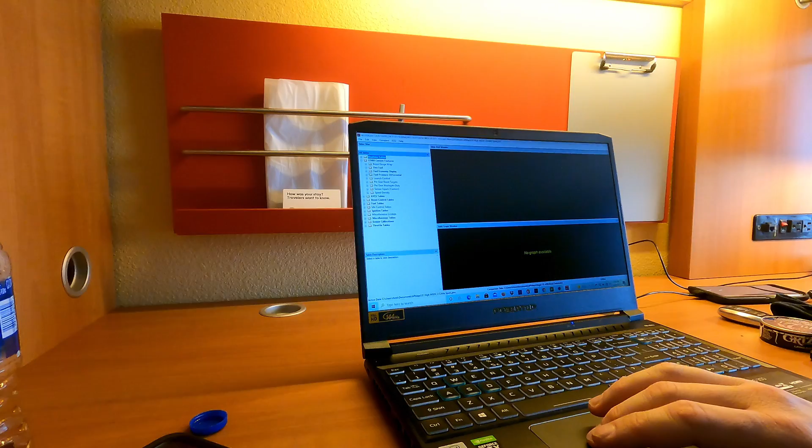So that's what it had on it. And I was figuring, well, it was an off the shelf map. It probably was knocking, whatnot. However, from a few things I did, I noticed, and all I did to change the map initially before I got here was this is comparing the map to my current one. So let me see. Let me try to zoom in here. I know I need to get a screen grab function.

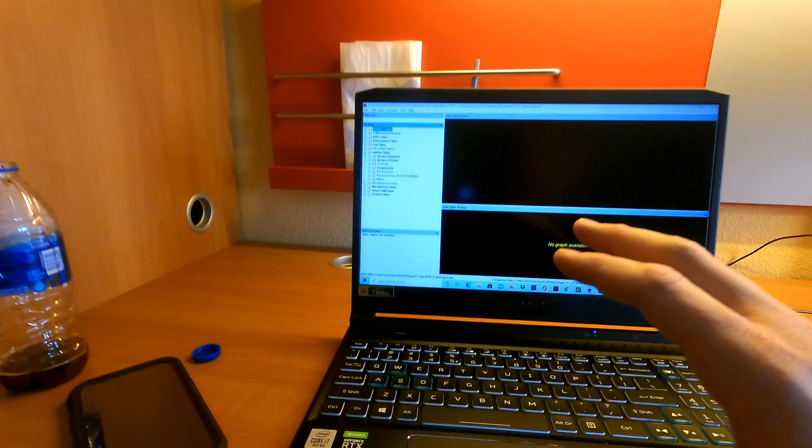The flex fuel, the fuel economy display, and the fuel pressure differential, that's all stuff that I changed because of the injectors and the flex fuel sensor and all that stuff. Same with flex fuel tables. The ignition tables I've changed. However, the point about the ignition tables, if you go to the primary one, looking at what was on it,

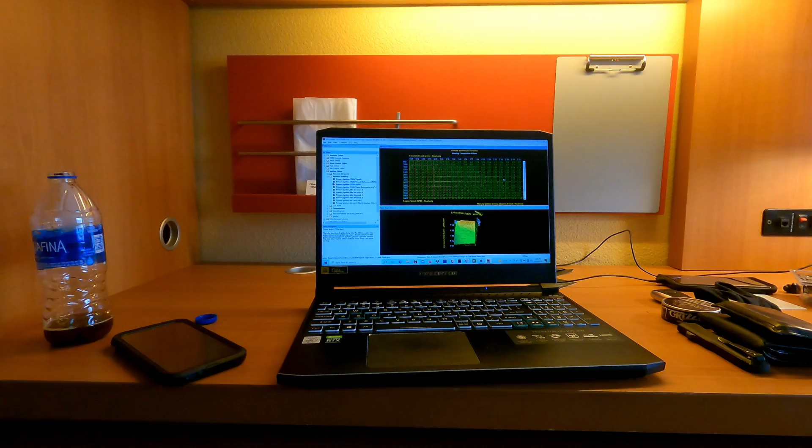I actually subtracted 2 degrees before I rolled out to come up here, because I knew that 91 stops being available pretty much at the end of Arkansas. I had a 91 map ready, but I was watching with the Accessport the entire drive out here, and it never really knocked, no matter what gas I put in it. So the Cobb map was fine. It wasn't really knocking. Wasn't knocking back home the little bit I was able to log and whatnot before I left.

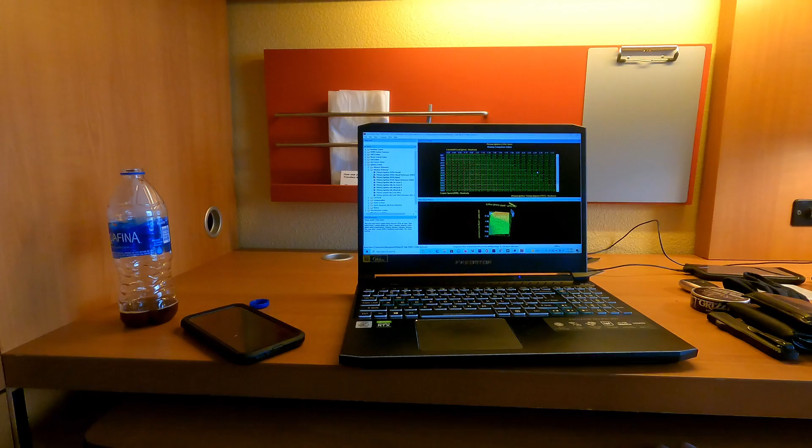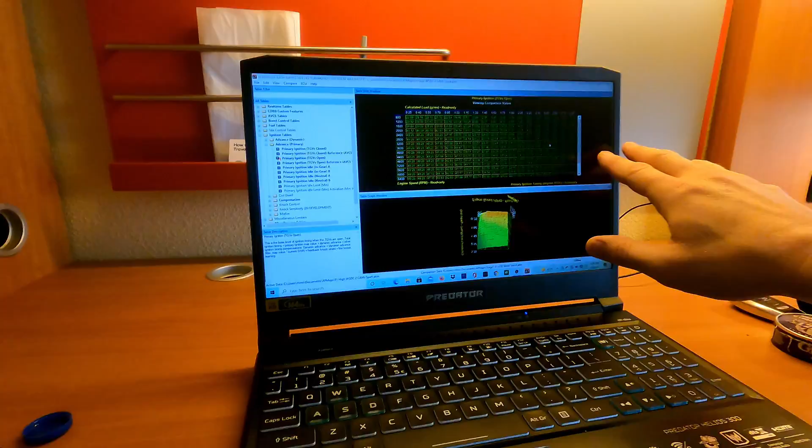So I'm thinking the piston blew, probably just because it was hot out and a lot of sitting and idling in traffic and whatnot. I think it just got too hot on cylinder 4 and caused an issue. Or it could have been some blow by that got in there. Who knows? That's not an issue anymore because I have the air oil separator and the cylinder 4 cooling mod. But point being, the spark was fine as it was for 93 and even honestly 91.

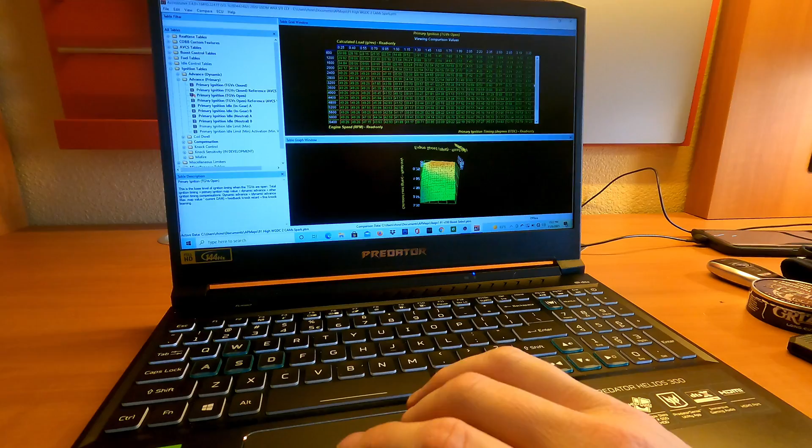I did go ahead when I got here and I added 2 degrees back into the 93 tune. I have had to reduce it in a few areas, as I was getting about a degree and a half of knock, mostly in transitional areas, from the 1 to 1.4 to 1.6 range. Let me go ahead and pull up my active value. Did have to reduce some right in here in the peak boost area. Whatever, I'm running 91 octane right now, but that's enough with ignition.

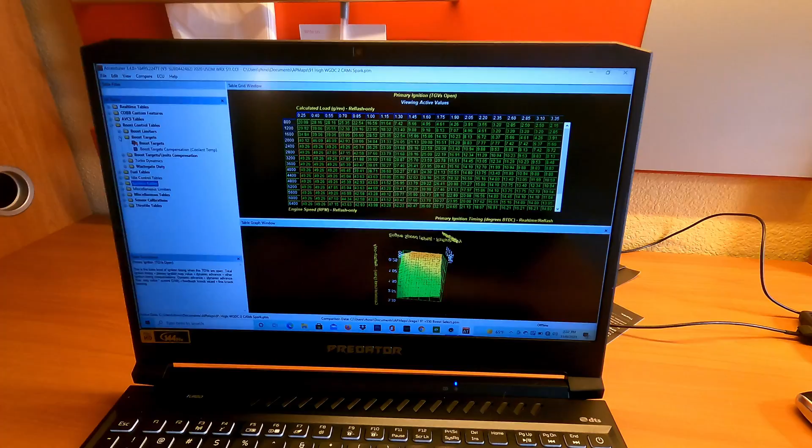One of the other things I noticed was my boost target, so this is the boost target I've got. It's set right at 20 pounds right now. Peak, tapering down. The car had no problem initially getting to that, relatively easy. Pretty much within one map change while I was driving it back home, I had it pretty close to target. However, when I got here, my wastegate duty, I was not seeing peak boost. I was only seeing a peak of about 17, tapering down to 13.

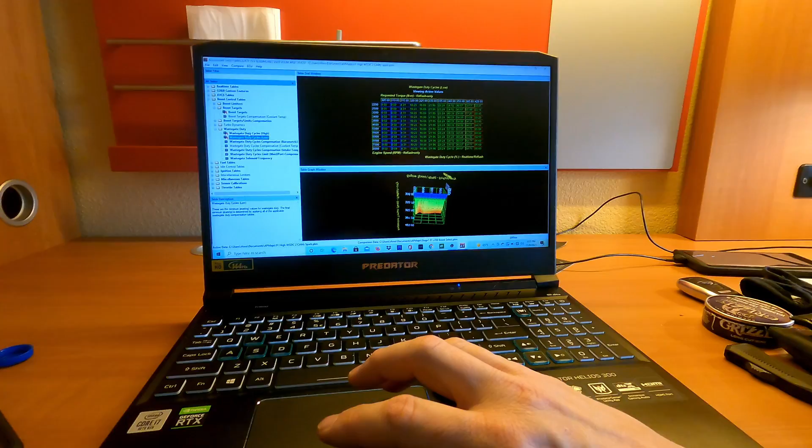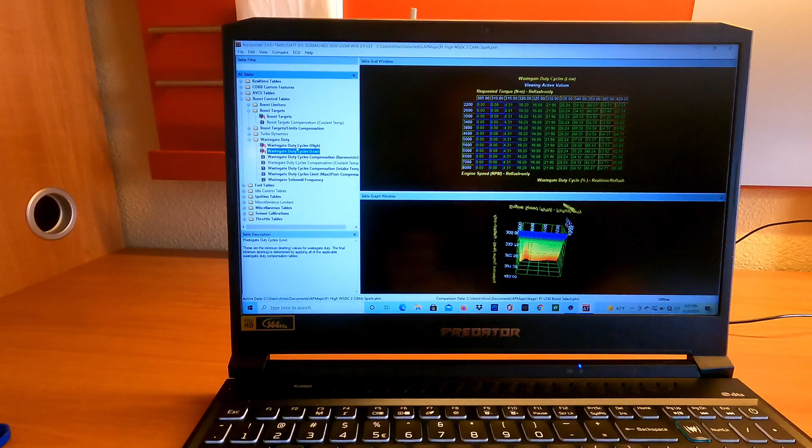Now, from the elevation change, that's most likely the main cause. It's only 200 to 300 feet above sea level back home, and we're about 5,200 feet above sea level here, so that makes sense. I think the turbo is just giving it all it's got right now. But I was able to manipulate some things and get my boost back up to a peak of 20, which really helped my torque. Speaking of that, I've got some logs here. I didn't have time to grab any logs back home of pulls.

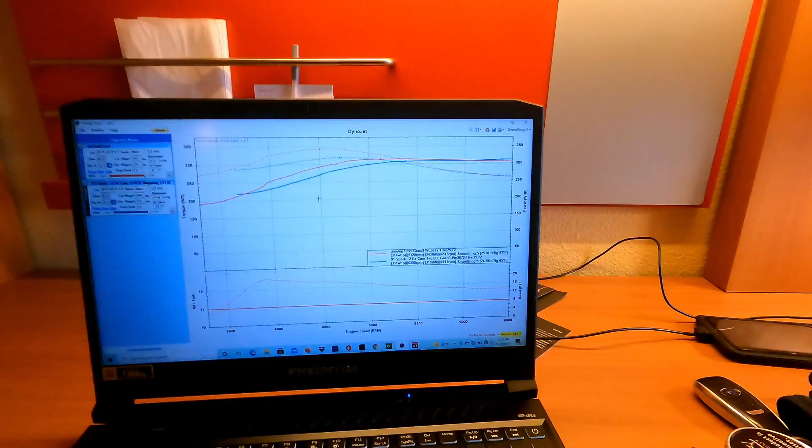Excuse me. It's really dry here. My allergies are killing me.

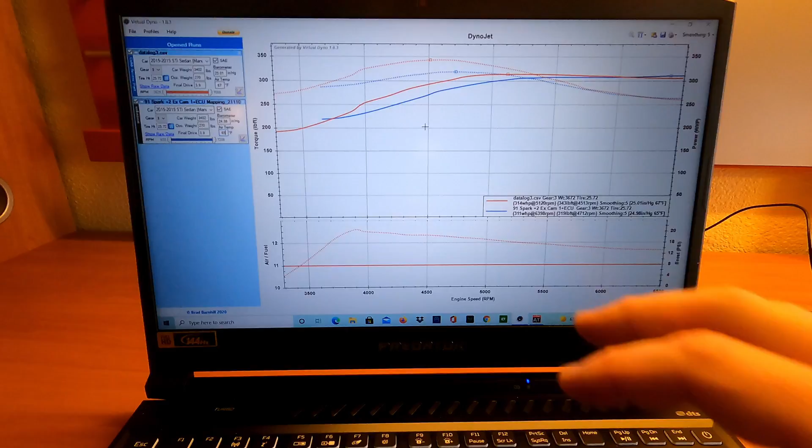But here's an example of 2 pulls. So my peak horsepower really hasn't changed much since I've been here. However, the torque is drastically different. Well, if you call 25 pound-feet of torque difference. But that's entirely from being able to get to the boost.

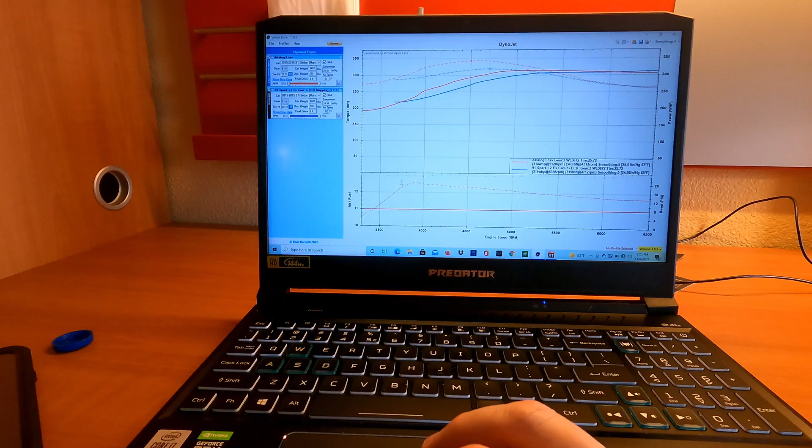It doesn't show it in this log, but I typically was only getting about 17 psi peak, tapering down to 13. The boost curves after about 4,500 have consistently been exactly the same on just about every log, so it tells me the turbo's giving it all it's got. However, I was able to get my peak boost up to about 20, right before 4,000, and it tapers back down, which gave me all this area of torque under the curve here.

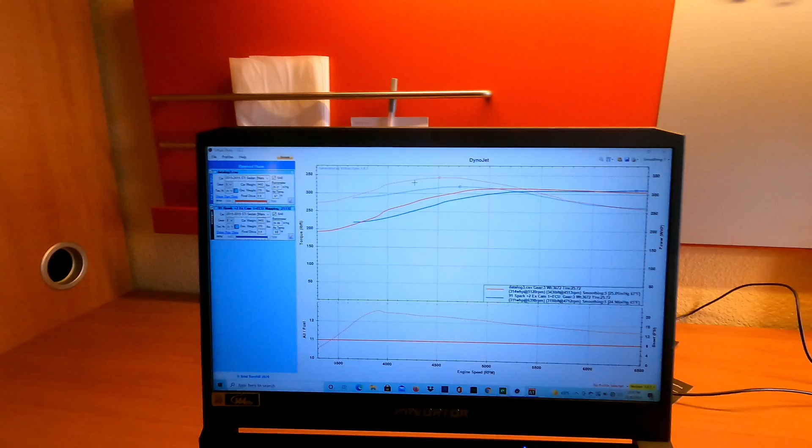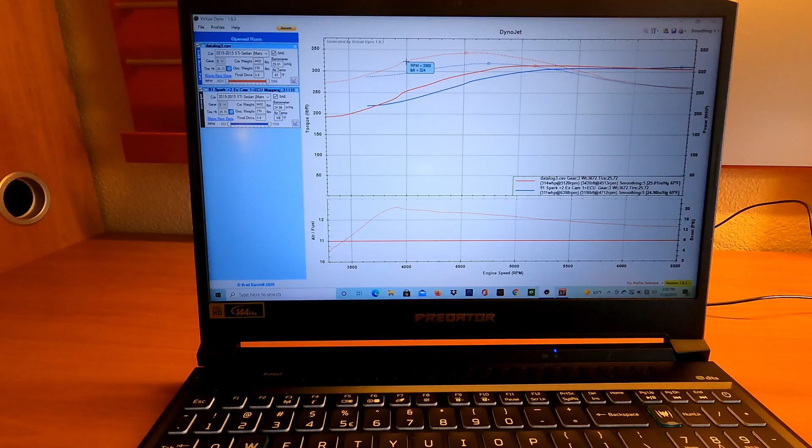If you go from 4,500, I've got 343 foot-pounds down to 315 here. So that's 30 foot-pounds of torque there. 4,000. Let me get, come on. Oh, it's not going to cooperate. I've got 324 to, come on.

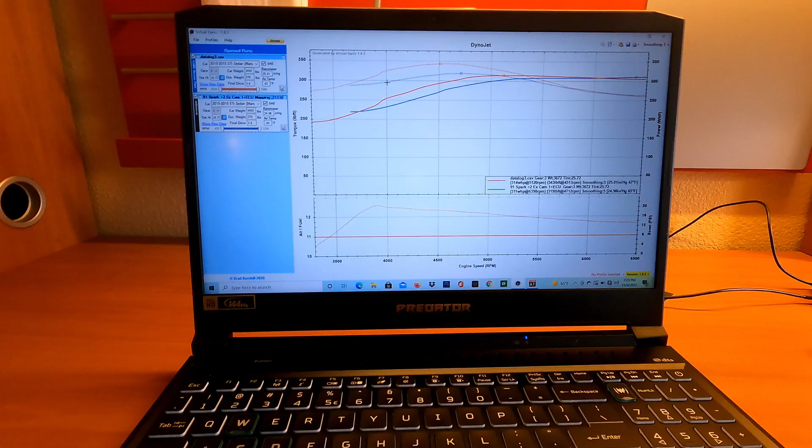Oh, it's not going to cooperate. And you can tell there's about a 20-something to 30-something foot-pound torque difference at 4,000. So there's a substantial area under the curve from the boost.

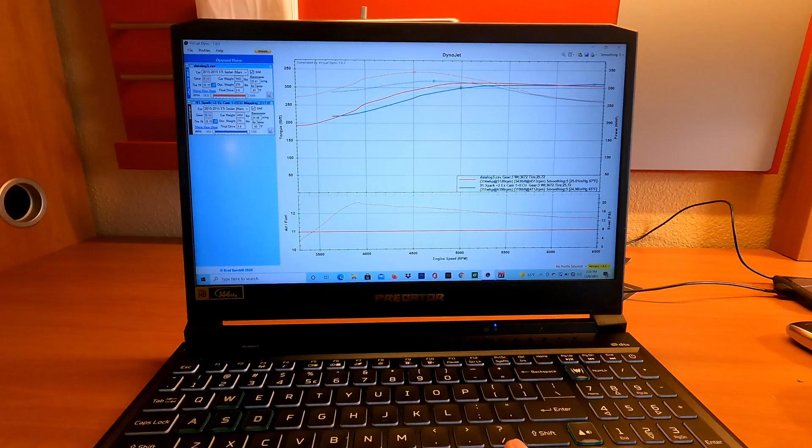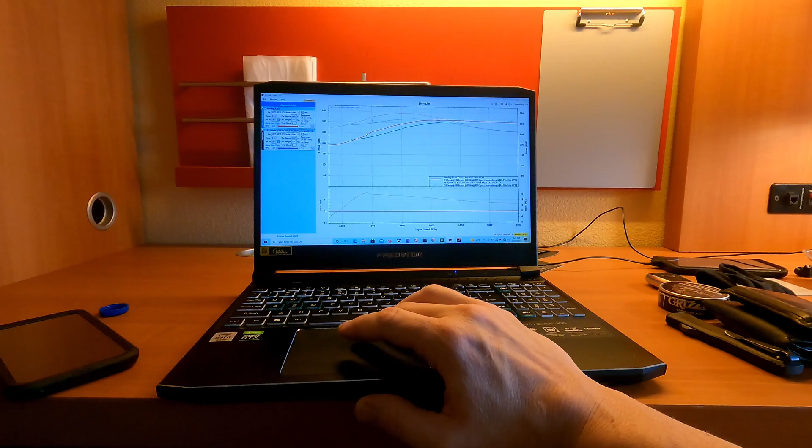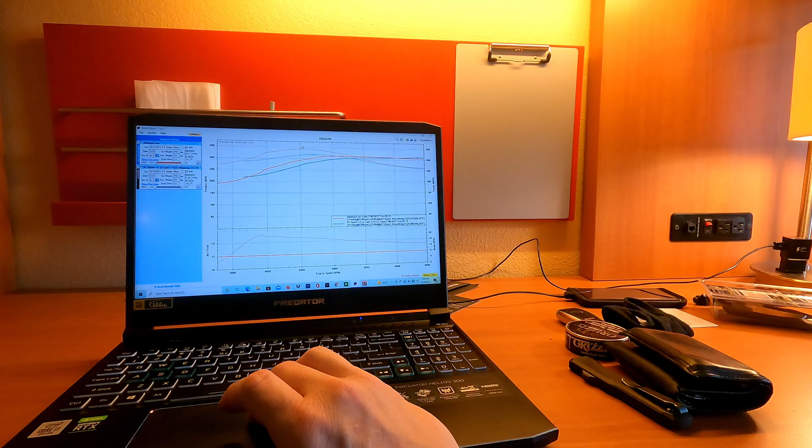I suspect once I put the downpipe on, I'm going to get some earlier spool, so I'll get my boost up sooner, which will drastically help my area right here. And I think it'll probably help carry boost a little bit higher up, so I might get some peak horsepower out of it. I don't think a drastic difference. I honestly don't know that I'll get much of a peak torque gain at all.

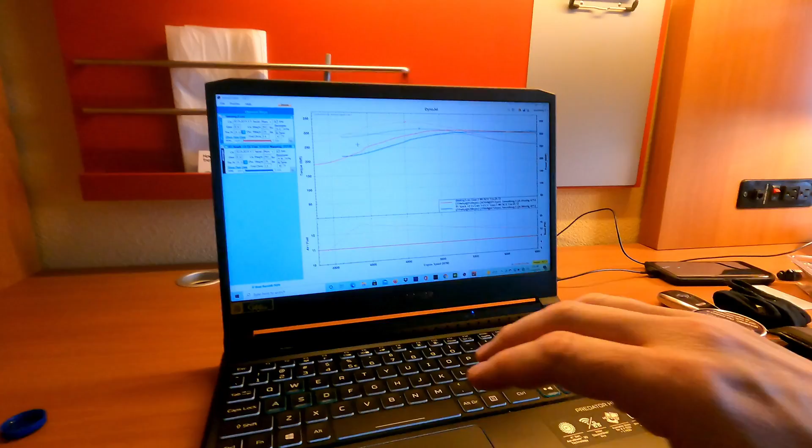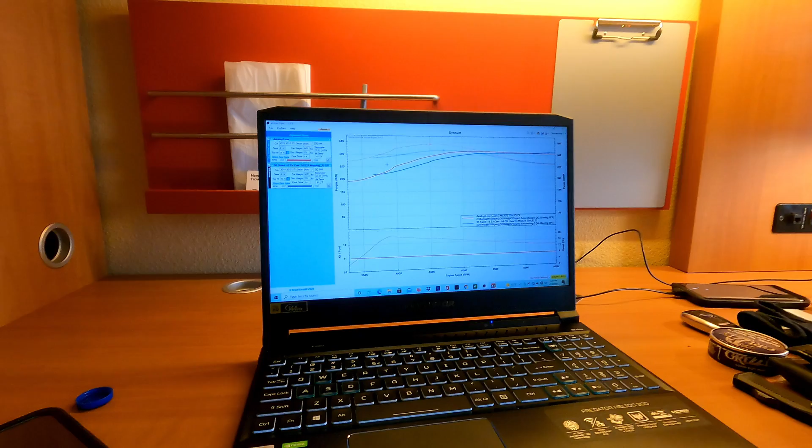I think it's just going to broaden it some, which is really what these cars need, because from the factory they just have no power band. They peak boost shortly, then taper off, and they don't make a lot of power with the stock turbo. And then, of course, once I go 85, I'll be able to crank up the boost back home more. I really don't think I can get any more out of the turbo up here.

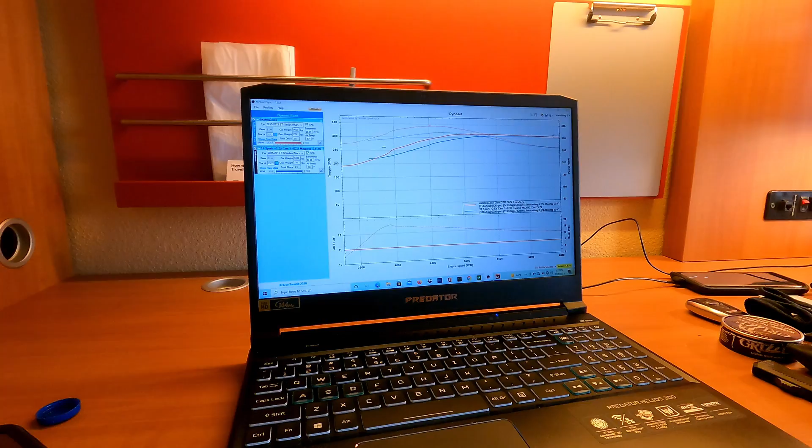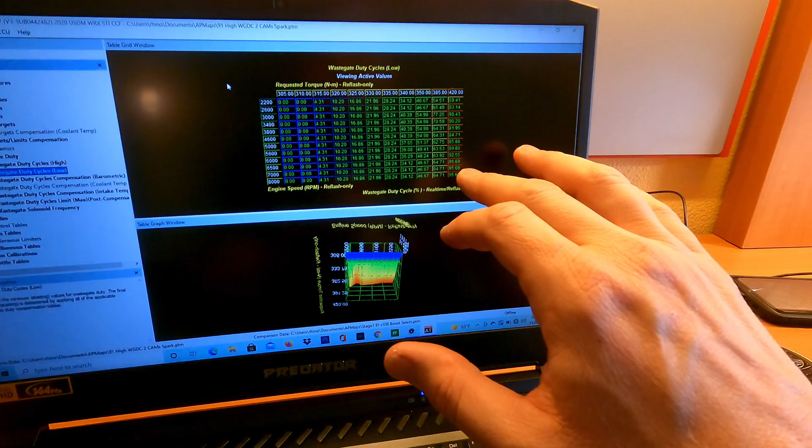I can add some spark in with the 85 and get some torque that way, but I'll probably wait till I get home to do that, because my wastegate duty cycles are significantly higher. Let's go to wastegate duty. Let me go to my low, and if you look, I'm close to maxed out on wastegate duty cycle, and this is on the low table.

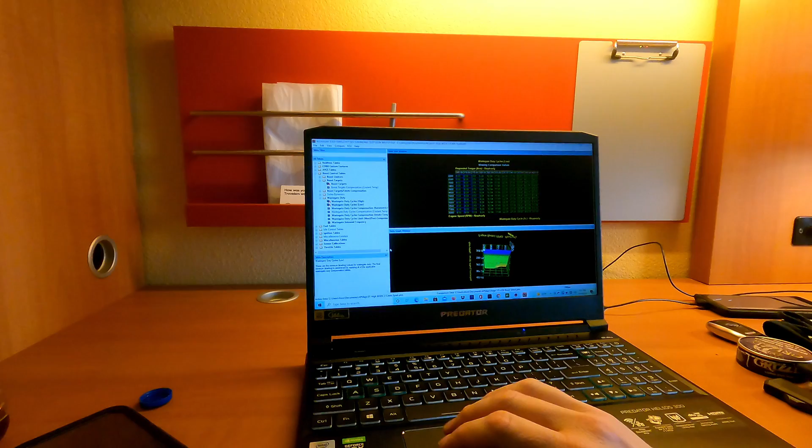And if I go to my comparison value, which is basically what I had back home, I'm looking at 30% difference in wastegate duty cycle for the most part. So I've got way more wastegate available to me back home, so I should be able to make way more power back home. Plus, even on 93 back home, I'll probably be able to make more, because I should be able to tweak the spark some.

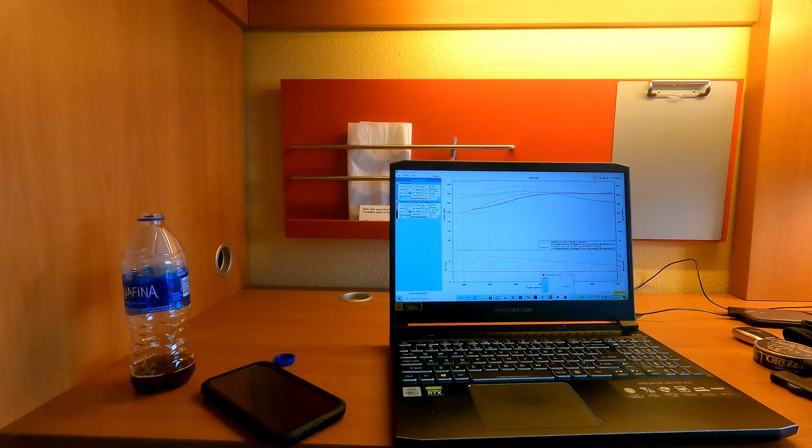But anyway, just some stuff I've been playing with on this. This has just been in my spare time. I've not even really been real-time tuning. I've just been out driving. If I get a chance to do a pull, I log it and do a pull and see where I'm at.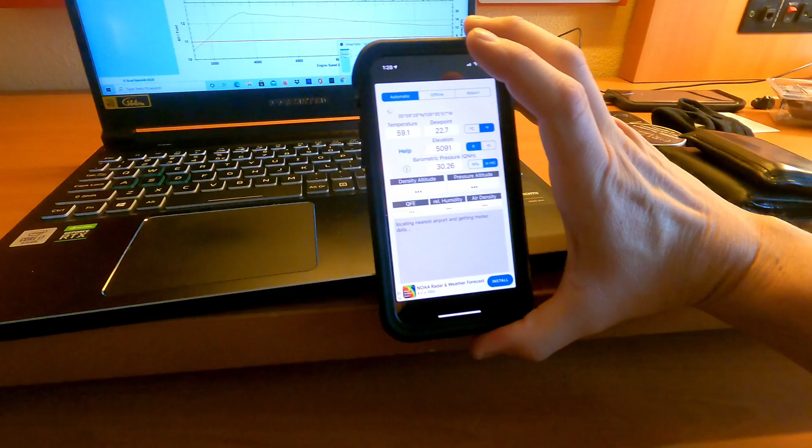But I've also been recording my, let me pull up the app here. This is the app I use. It's an aviation app. But basically it gives you the meteorological data for the area you're in. For example, once it pulls up, let's see the temperature, dew point, elevation, the QNH barometric pressure is okay. However, the QFE is really what you would use for the SAE part on the dyno.

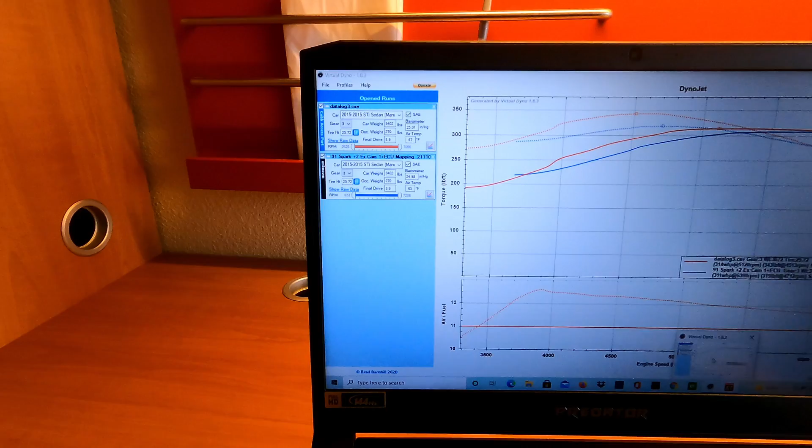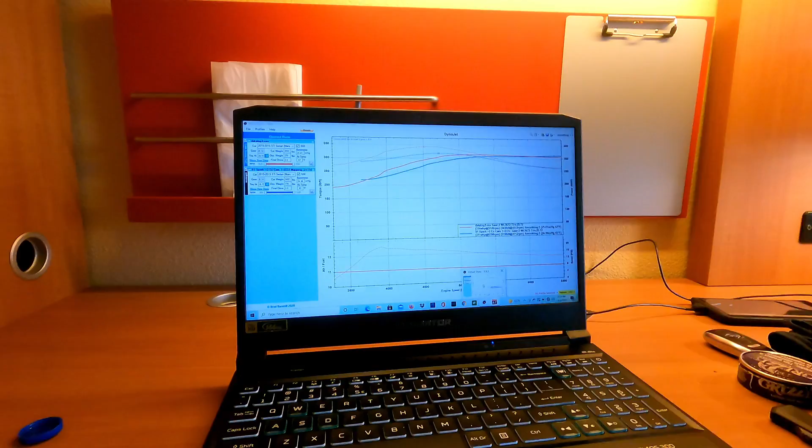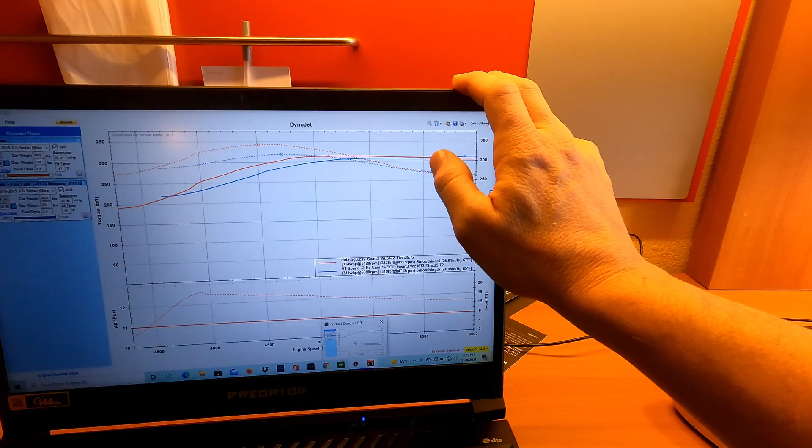So I've been playing with that. Been using this pretty good. If the road's good and smooth, you get good data. If there's hills and whatnot in the road or dips in the road, you don't get very good data. As you can see, there's a couple cases. For example, on this one, it looks like it made more power here on this older graph, but I guarantee you that was just that the road started going downhill right there up top. Just a case in point.

Anyway, just a real quick video. Not really that real quick, but I just wanted to kind of show off how you could do this yourself if you understand engines. If you have your own time, you could put a lot of time into it. You don't have to rush it, and it's a good way to know your car. I said before, I tuned most of my own cars for the last several years. All 3 generations of Coyote, the Cobra.

I'm going to be tuning the Lightning soon, which is for the most part the same as the Cobra, just a little bit different. These are really not that hard. The variable cams, Coyotes have them too. It's the same thing. This is actually a lot simpler to tune the variable cams on than the Coyotes, because more or less there's only one or a couple spark tables and fuel tables you have to mess with. Whereas the Coyotes, they have 50-something map points you have to mess around with.

Anyway, just a real quick update, because I'm bored and I've just been playing around. So I will say that the car's doing fine. I hadn't really noticed anything. Like I said, I think the oil leak is really just left over from not having a chance to clean it all the way. And so far so good with that.